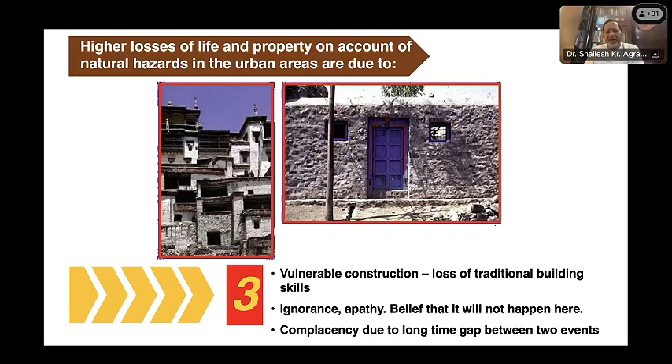Otherwise, because of the space problems everywhere, vertical extension and addition of rooms and other things are being done. That also leads to higher losses of life and property. So all of you will agree that urbanization, expansion of habitat into unsuitable vulnerable areas, higher population density, ignorance and apathy about the natural hazards, non-engineered unsafe construction, all these things are leading towards higher losses of life.

So all these things exist, and what is the scenario? We have a very robust technical framework, as well as the Disaster Management Act and disaster management policy, and I will tell you about the Indian standards. We have very good, exhaustive Indian standards dealing with all kinds of hazards in the country.

We have the National Disaster Management Authority, NDMA, and the Disaster Management Act and Disaster Management Policy clearly say that there should not be any loss of life during an earthquake or any event. So zero tolerance to avoidable loss of life is the motto of all these things. But despite all these things, we do have a whole lot of life-threatening collapses during earthquakes and other events.

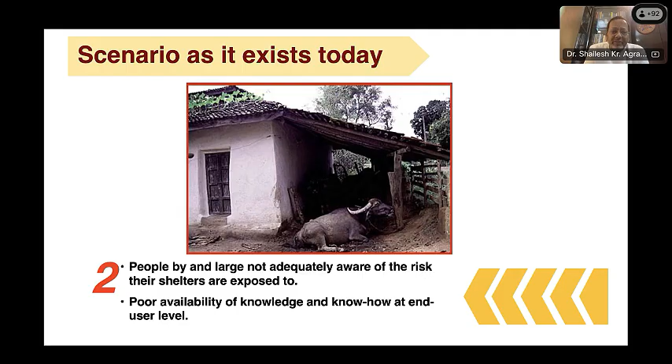People by and large are not adequately aware, and that is why these kinds of programs are being conducted. After the 2001 Bhuj earthquake, a whole lot of programs were organized, and organizations came out with literature, explanatory handbooks and all. But India being a vast country, last mile connectivity is sometimes missing. We train faculty, prospective engineers and architects, but artisans still need to be trained. So people are not adequately aware of the risk their shelters are exposed to, and there is poor availability of knowledge and know-how at the end user level.

Then, implementation of existing laws is not up to the mark. I can give you an example. The Ministry of Housing and Urban Affairs came out with model building bylaws, MBBL. It can be downloaded from the ministry's website, and all the state governments were asked to develop their building bylaws based on these model building bylaws.

And in the model building bylaws, after the 2001 Bhuj earthquake, a specific chapter on disaster management was included: if your state or area is prone to natural hazards, you need to incorporate a design basis report and get a structural stability certificate from a practicing or authorized engineer. But India being a federal country, in some states those bylaws are incorporated, in some they are not. And even where incorporated, their implementation is not up to the mark.

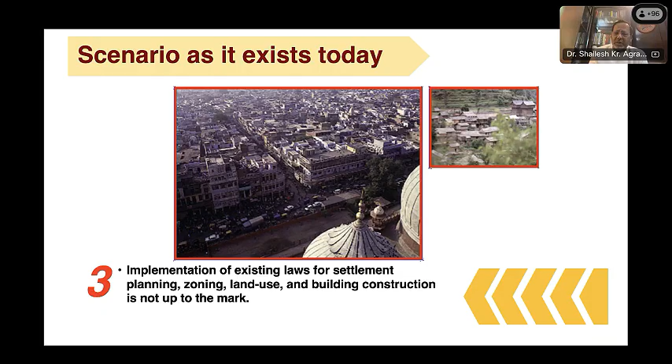Then, as I told you, last mile connectivity. There have been several programs run by the Government of India, in fact by NDMA: training programs, sensitization programs, social media uploads, manuals, films, and other things are in place. But despite all those things, there is a lack of adequate mechanisms and institutions for dissemination of knowledge.

So this is the scenario which exists, and we also know that India is committed to the sustainable development goals. SDG 11 clearly indicates that we have to make cities and human settlements inclusive, safe, resilient, and sustainable. So resilience and safety are part and parcel of any development. And I have also included here sustainable development goal 13, as we cannot take these natural hazards stand alone.

Now we have to take climate change mitigation strategies into account, because climate is changing very fast. The planet Earth is heating up, temperatures are rising, and a whole lot of things are happening because of pollution, greenhouse gas emission and energy use. India is committed to be Viksit Bharat by 2047 and to become a net zero country by 2070. So in addition to safety and disaster resilience, we need to incorporate climate change mitigation strategies; sustainability also needs to be taken into account for the built environment.

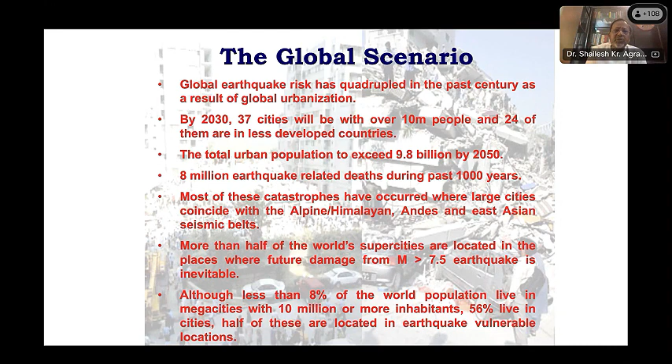Although less than 8% of the world population lives in mega cities with 10 million or more inhabitants, 56% live in cities which are vulnerable. In fact, in our country also, more than 50% area is vulnerable, in a high seismic risk zone. This is just to show you yearly. You can see here, some earthquakes keep coming, and this is data taken from the National Institute of Disaster Management.

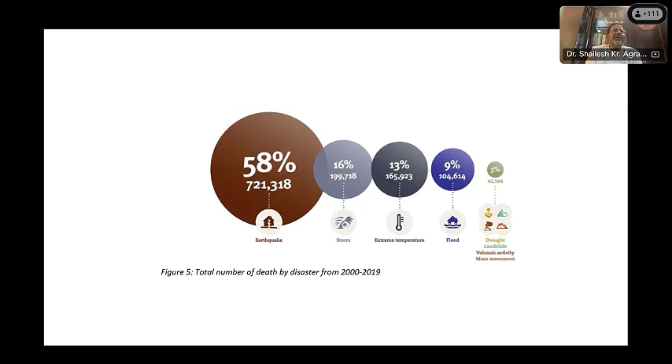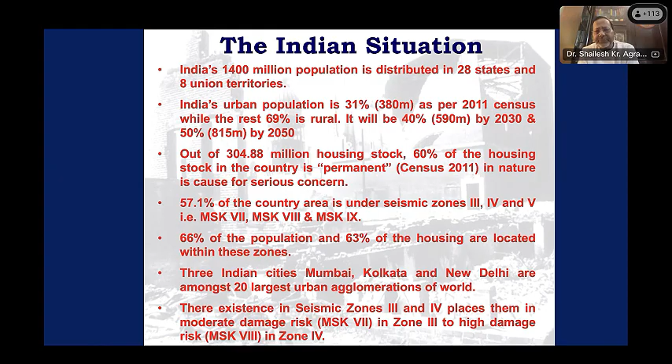And if you see here, more than 1 million houses are damaged annually, in addition to human and other losses. The earthquakes which are of magnitude more than 8 are classified as great earthquakes, and India is seat to many great earthquakes, and I have listed them here for you. The only problem is now we are just waiting, because as I told you, the return period of earthquake is quite high, and God forbid if India is to face an earthquake of more than 8, this will be disaster.

And there have been a number of studies where it has been shown that if the 1819 Kutch earthquake repeats now, the losses will be enormous, which cannot even be defined. So there will be so much loss. Okay, so you can see 1819 we had an earthquake of more than 8 in Kutch region, Assam 1897, 1905 in Himachal Pradesh, Kangra, 1934 Bihar Nepal earthquake, 1950 Assam Tibet earthquake, 2005.

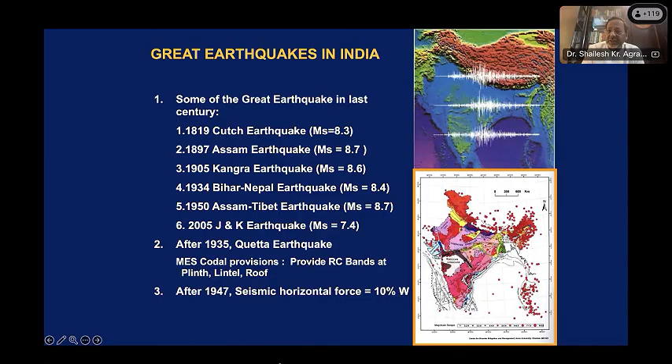And these are some of the great earthquakes, and recently, from 1990 to 2005, in fact, our urban areas, tier 2, tier 3 cities were struck with earthquakes. Like 1991 we had an earthquake in Uttarkashi, 1993 in Latur, Jabalpur 1997, 1999 we had an earthquake in Chamoli. Then 2001 was an eye opener for all of us, because that earthquake came in Bhuj, and then Ahmedabad, which was 300 kilometers away from Bhuj.

There, multi-story reinforced concrete buildings collapsed like a pack of cards, and everybody was in shock. Like, the properly designed buildings, how could they collapse, leading to huge loss of life and property. The 2005 Jammu and Kashmir earthquake also caused huge destruction. And then cyclones also, every year we have cyclones, floods, and the 2004 tsunami also caused a whole lot of losses. So these are the major natural disasters.

Just again, you can see the average return period of an earthquake of magnitude more than 5 in our country is less than 2 months. And if we divide the entire region into Kashmir and Western Himalayas, Central Himalayas, Northeastern region, Indo-Gangetic Plain, Rann of Kutch, Peninsular India, Andaman and Nicobar, you can see all areas in our country are prone or susceptible to earthquakes, and anywhere an earthquake can come.

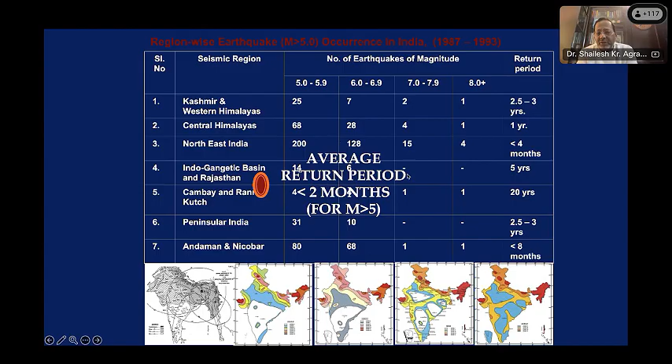Now, just to give you some idea about the losses due to disasters: Kashmir earthquake, 95,000 deaths; Bhuj earthquake, 13,000. And you see, same place, 1819 Kutch earthquake, deaths were only 1,500. So just think, because of fast urbanization, the kind of built environment we are constructing or developing, all these are becoming death traps, and will amount to higher losses of life and property.

Latur earthquake: Latur was in peninsular India, which was supposed to be a seismically stable area. There also huge destruction, 7,928 deaths were reported, and the majority of these deaths were in masonry buildings, and masonry buildings in our country are normally unreinforced and constructed by artisans without seeking help of engineers and architects. And as I told you, in the last census, out of those 304 million buildings, more than 50% are masonry buildings.

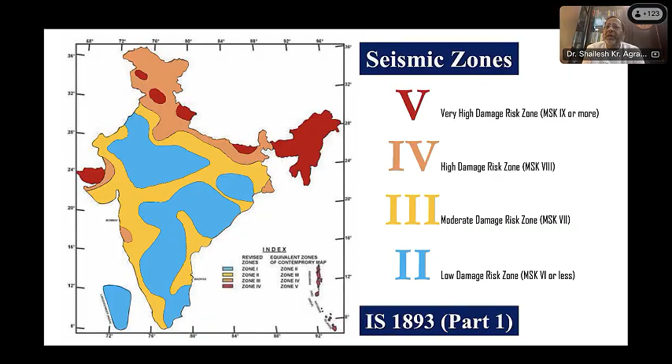So zone 5, 4, 3, and 2 are related in terms of intensity. This was the map which most of us know, and now this map is replaced by another map where we have again resorted to 5 zones. We have added another zone, 2, 3, 4, 5, 6, and all these zones are revised. I will give you a brief history of how these maps evolved.

The first map came in 1962, then it was revised in 1966. At that time India did not have any instrumentation or other means, so based on whatever earthquakes had been reported in the country, the maps were created, and the entire country was delineated into different seismic zones.

The major problem with these maps was that, suppose a place where earthquakes are coming quite frequently, that frequency was not incorporated. Only the earthquakes which had come, whether high intensity or low intensity, were used to produce these maps. But the recent map has tried to incorporate frequency and other aspects as well. That is the basic difference.

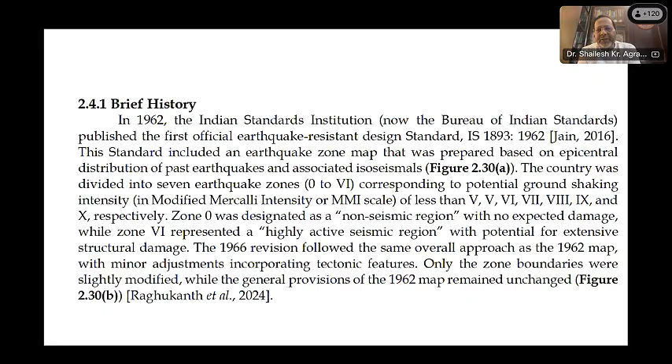And after that, this map was revised based on the earthquakes occurring in the country. The same thing happened when the 2001 Bhuj earthquake came. We divided and again reduced the zones from 5 to 4, eliminating zone 1, keeping zones 2, 3, 4, and 5.

Then in 1966, again based on the earthquakes, the map was revised and we had 7 zones. Then in 1967 the Koyna earthquake came, so again the map was revised, and by 1970 we had this map, dividing the entire country into 5 zones: zone 1, 2, 3, 4, and 5.

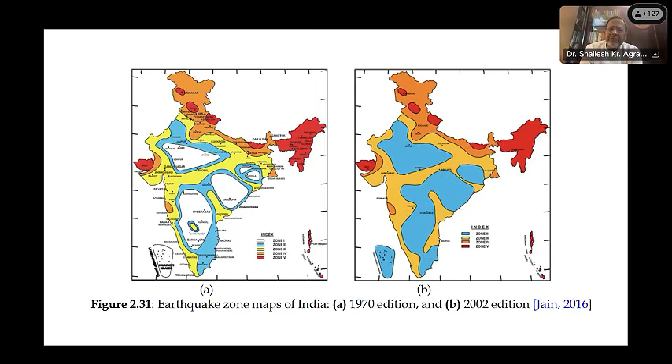So if I have to give you this in tabular form: 1962, and as I told you, these hazard zones are associated with the intensity level, and the explanation of this intensity level is given.

Intensity means the likely damage because of the earthquake. So suppose you are in intensity 7 or intensity 8, what would be the likely damage to your structure or your area - that is given. The moment you find this zone 3, you connect it with the intensity, and you will be able to find the likely damages.

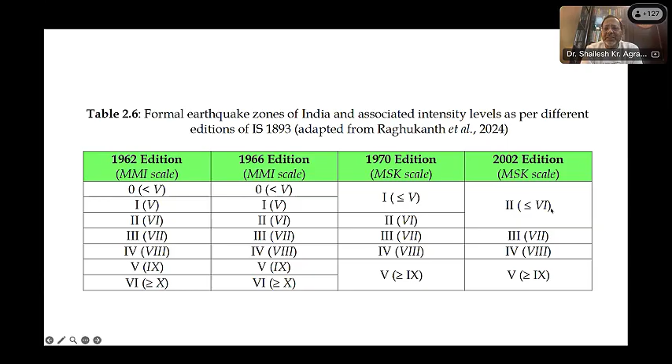So again, that is qualitative. In 1962 we had 7 zones, in 1966 7 zones, they were reduced to 5 zones in 1970, and then reduced to 4 zones in 2002. You can see here MSK intensity 6, zone 1 and 2 were merged, then 3, then 4, then 5.

Now, as I told you earlier, the nationwide earthquake hazard map defines expected ground motion intensity and ensures harmonized structural design across the country. These hazard maps can directly be used for structural design - you have to find the likely ground motion multiplied with the mass, and you get the lateral force, which you can apply to your building.

So these maps, as I told you earlier, the approach was rudimentary, based on deterministic earthquake hazard analysis, and now it has been based on probabilistic earthquake hazard analysis. Okay, so this is the map.

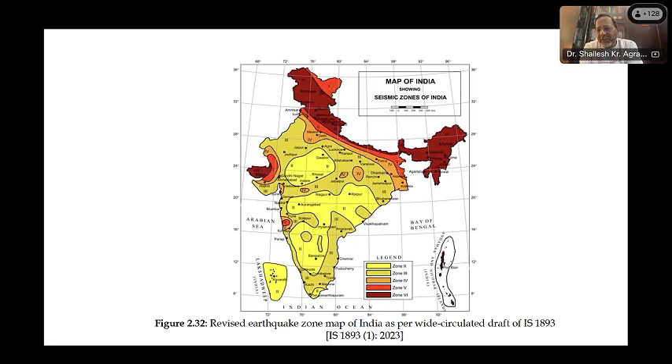The BIS IS 1893, which has finally been published now, there is a slight difference between the map which was circulated and the map which is published. That is why I'm showing you both maps. This is the map which is widely circulated - zones and everything are the same, but there is some change in the area. So please don't use this widely circulated map, but use the map given in the finally published IS 1893. So this is the map you need to use.

As you can see here, India is divided into 5 zones, and intentionally we have kept zone 1 out. We are starting from zone 2, so we have zone 2, 3, 4, 5, and 6. The areas which were falling in zone 2 earlier may now fall in zone 3, the areas in zone 3 may fall in zone 4. Somewhere zones are enhanced, somewhere zones are kept the same, and somewhere zones are enhanced by 2 times or 3 times.

There has been a lot of apprehension since this code was published that there will be a rise in cost due to the rise in lateral force. Yes, that is right. But this time the committee, CED 39, was quite aware that safety is something which should not be compromised, and safety should be given top priority.

That is why, if you look at the attributes, safety is the first thing which needs to be given importance. If you do any project, any structure you design or construct, there are several attributes to it. One is safety, sustainability, functionality, then aesthetics, and then economics. So these are the 5 attributes, and the first and foremost attribute is safety. Then is functionality, then sustainability, and then aesthetics and economics.

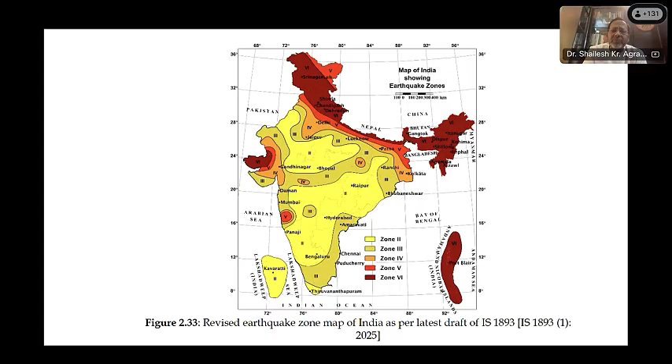So these are the 5 zones, and we have to use this map. Why is this map useful? Because this map will help you in estimating the earthquake hazard. To estimate that earthquake hazard, you can find out the earthquake force your structure will be subjected to, and you have to design your structure for that lateral force - estimating, finding out the earthquake zone, and then converting it into the lateral force.

So for zone changes, again there have been changes. As I told you, the previous 4 zones - 2, 3, 4, 5 - are now demarcated into 5 zones: zone 2, 3, 4, 5, and 6. Just by converting 4 zones to 5 zones, there has been a shifting of boundary of zones, causing many towns and cities to fall in 1 to 2 level higher zones. Earlier zones were 2, 3, 4, 5; now zones are 2 to 6. So again 5 zones, and because of shifting of boundaries, many towns and cities now fall 1 to 2 levels higher than previously.

That amounts to your structure being subjected to higher seismic forces. For example, cities like Bareilly and Patiala, which were earlier in zone 3, and Almora, Chandigarh, Darjeeling, Dehradun, Gangtok, Nainital, Shimla, which were previously in zone 4, now fall in zone 5 and zone 6. Bareilly and Patiala are 2 zones above - from zone 3 they have come to zone 5. Similarly, Dehradun, Gangtok, all these highly seismic vulnerable areas now fall in seismic zone 6.

Added to this is the fact that the estimate of peak ground acceleration has generally increased. Because of change in zone, and also because of incorporation of probabilistic seismic hazard, the peak ground acceleration has increased in each zone. For design forces, earlier we had an importance factor, but this time the importance factor has been capped at 1, and we have kept different return periods. Earlier the return period was not there; now, based on the kind of building you are designing, you can choose the return period, and based on that, estimate the earthquake force. This is the major change.

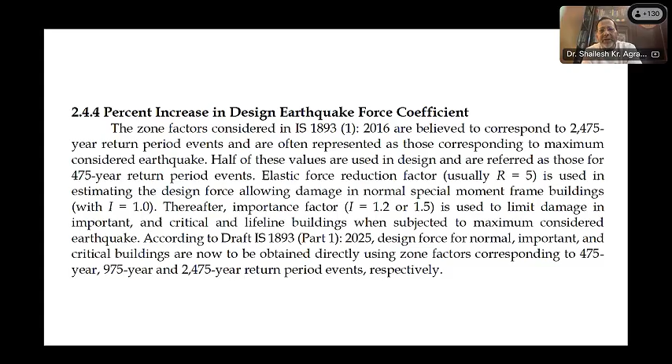And again, as I told you, the response reduction factor is kept, but the importance factor is now 1. Earlier, depending upon the kind of building, the importance factor was 1.5 for crucial services, 1.2 for important buildings, and 1 for all normal buildings. But this time we have kept I as 1, and we have changed the return period. So based on the return period, you can have the zone.

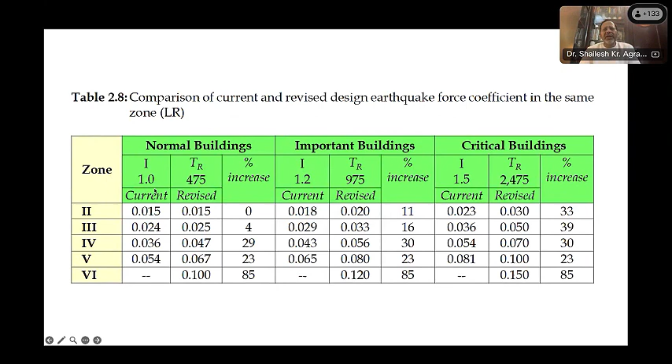For normal buildings, the revised percentage is nothing for zone 2, zone 3 4%, zone 4 29%, zone 5 23%. Similarly, important buildings 11, 16, 30. This was where the zone is the same in the earlier and the newly published code. But if your zone is enhanced by 1 level, the percentage increase is quite high. It goes up to more than 100% for critical buildings, or 86% for important buildings. And if the seismic zone is 2 levels higher, it goes by more than 200%.

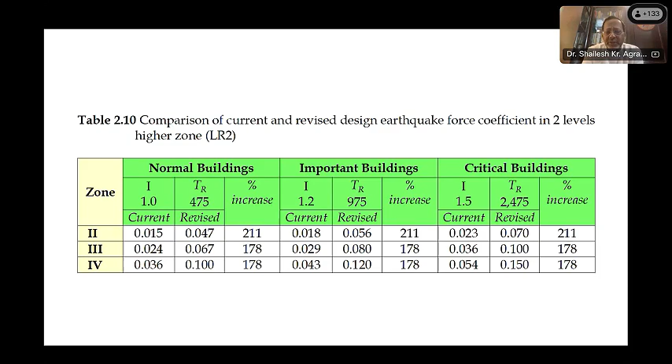I thought of showing you this data. The National Disaster Management Authority created an expert group comprising IIT Madras, IIT Bombay, Central Building Research Institute, IIT Roorkee, and other academicians, and asked them to submit the seismic risk assessment of the country. They submitted a report to NDMA, and all these tables and maps I showed you are part of that report. So this is authentic data taken from that report.

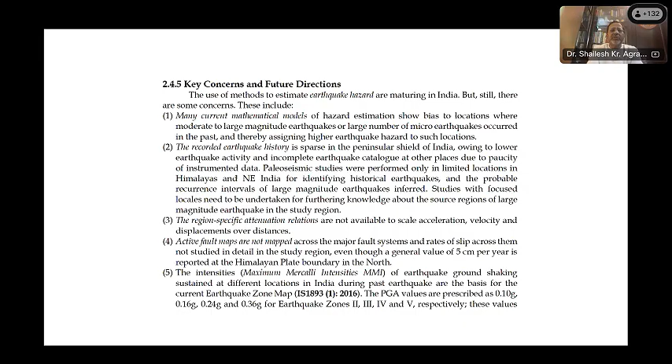Since there have been a lot of apprehensions amongst professionals that there will be a substantial increase in the force, we have objectively put these things in the report. And yes, there will be an increase, and we have to choose between safety and other aspects. This time safety is given priority. I will not cover this. There have been other key concerns also, regarding region-specific attenuation, but I'm not going into detail on all these things.

Then this time, soil. Effect of soil: if your building is founded on a rock, or if it is founded on an alluvial plain or on a marshy land, the effect of earthquake will be different. The earthquake waves get amplified when they pass through soft soil. If your building is founded on rock, nothing may happen, so the seismic waves may get attenuated.

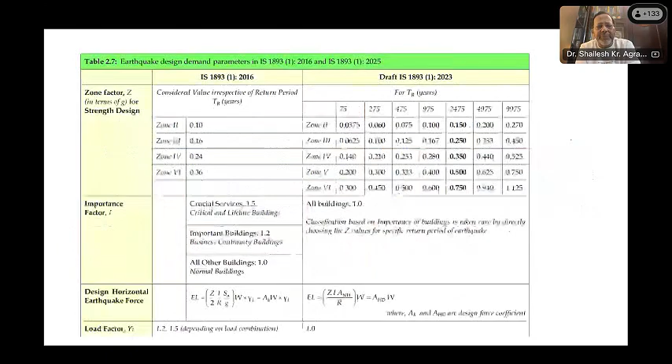There are five soil conditions, and based on that you can choose the response spectra, and from this response spectra you can find out the horizontal acceleration. Just to make you understand, this is the seismic zoning map. So from this seismic zoning map, this is the formula. From the seismic zoning map, you find out this coefficient. I, R, and everything is given in tabular form. Then you have to find out this Ah, and W is the weight.

So for this Ah, what will you do? Z is from this table, where you choose what kind of building you are creating. Based on that you will choose the return period, and based on this return period, in which zone your area is falling, you will choose the Z factor. Then for Ah, the seismic coefficient, you will use this response spectra.

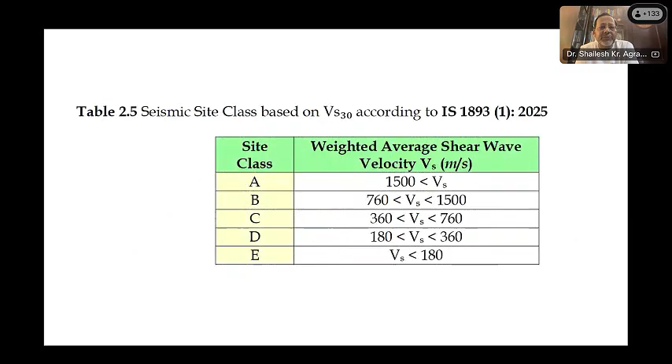And in this response spectra, you have to find out the time period. For the time period, this is a natural period for which detailed formulas are given in the code. Depending upon the height of your building, width of your building, type of building, you can estimate the time period readily. Once you know the time period, you can find out the design horizontal acceleration. That acceleration, when multiplied with the weight, will give you the horizontal force your building will be subjected to. And here we are incorporating the soil conditions.

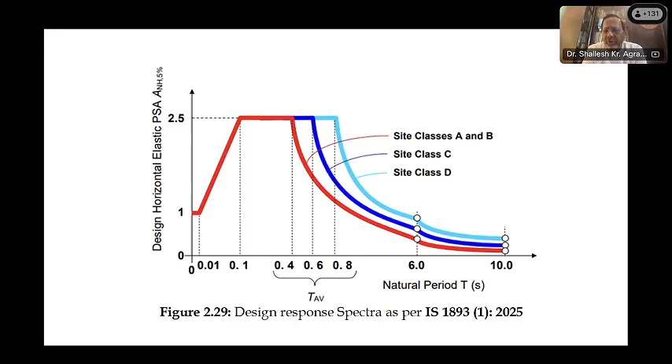So this is all about IS 1893, and very soon a few explanatory handbooks will be published by BIS to make things easy so that everyone can comprehend this. So this was all about 1893, and I thought I would try to address some of the apprehensions of professionals about these codes. Okay, so now let me move to the easier part.

As I told you, whenever an earthquake comes in the country, we come out with robust codes, we come out with guidelines and all. But over the years, we keep on forgetting about this. In 1935, when India was not even independent, an earthquake came in Quetta, which is in Pakistan, and there was huge loss of life and property. But in Quetta there was a military establishment, and they came out with the code in 1935.

There they introduced lintel band, corner reinforcement, and all these things for masonry buildings, and the entire Quetta town was reconstructed. Then again an earthquake came there, and the buildings which incorporated those earthquake resisting measures performed very well. That bond was called Quetta bond. But after some time we forgot; because that was a military installation, they could enforce those measures. But with the passage of time, all those things were forgotten.

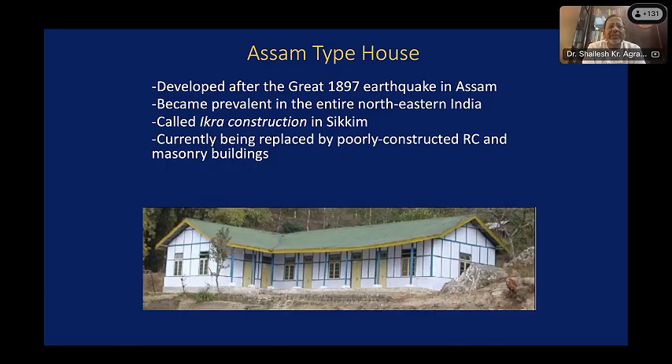Assam type house: we have Ikra walling, and then we have bamboo, which is excellent for seismic resistance, lightweight roofs, all these traditional structures. And I already told you that was known as Quetta bond, which now we have as lintel band, plinth band, and all those things.

So in 1935, the first seismic code was developed. In fact, at that time 10%, 0.1, was the seismic coefficient. After the 1935 earthquake, the code was formulated, and it was said that all the buildings should be designed so that the horizontal force should be 10% of their weight. Okay, so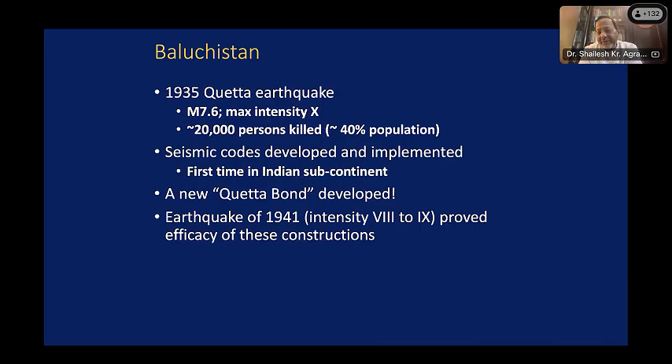In 1935, all these things were given. You can see quoin bond, vertical reinforcement, corner reinforcement, everything was given during that earthquake. Okay, but with time we forget that. Now let me just tell you that it's not new.

The 2001 earthquake was the eye opener for all of us, and that is why after that, earlier disaster management was part and parcel of the agriculture ministry, and then it came under the Ministry of Home Affairs. Then NDMA was established, the National Disaster Management Policy came into place, the Disaster Management Act came, building bylaws came into force, a whole lot of things came, because all kinds of buildings, properly well built reinforced concrete buildings, high rise, posh apartments in Ahmedabad, collapsed like a pack of cards.

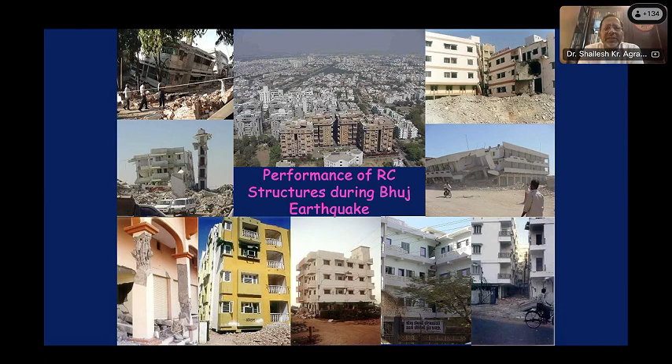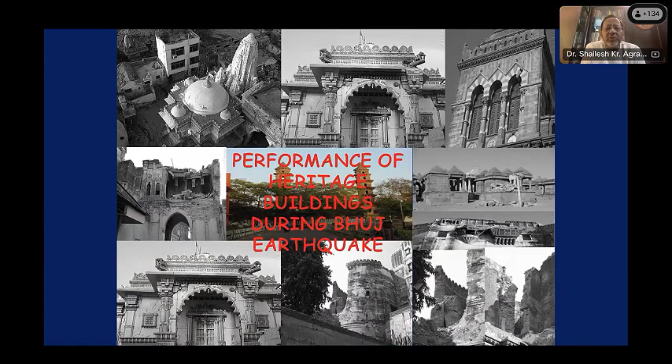Okay, then again a whole lot of work was done, and heritage structures, more than 10,000 heritage structures, suffered huge damages: domes of historical buildings, huge walls, stone masonry walls, they all collapsed during the earthquake. So heritage buildings also suffered damage during the earthquake.

Then there is another important thing which we observed: immediately after an earthquake, everybody resorts to repairing of structures. But it was found that most of the time this repair is cosmetic repair, without getting into how the structure failed and how it should be strengthened. We need to understand the difference between strengthening and repair. Repair is something cosmetic. If something is falling, you just put some support to it and make the structure again.

But if an earthquake comes again, you are not strengthening it for horizontal load or for ground shaking. For that, you have to seek the advice of a structural engineer, and you have to understand the building, its structural type, the damage, its residual strength, all those things. It's a very scientific and expert area, and you need to seek advice of experts for doing retrofitting of a structure.

So just looking at the damage and covering it with plaster and putting some sort of support without connecting it with the other parts of the structure will make your structure more vulnerable to future events. So unscientific retrofitting is to be prohibited, and specialized contractors and professionals need to be consulted for undertaking any repair, strengthening or retrofitting work. So repair is cosmetic, retrofitting is strengthening of your building scientifically.

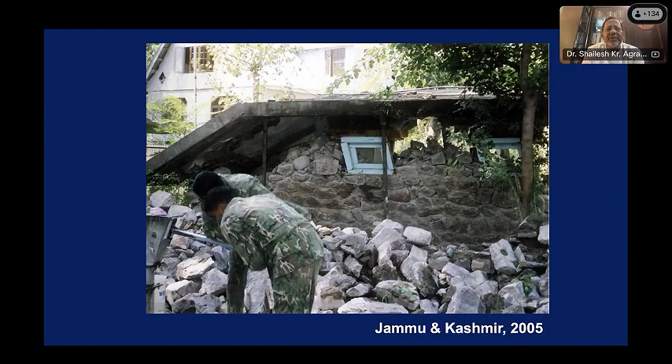Some of the failures I'll just show you quickly. So you can see here, this is a heavy roof which was just put on steel tubes, and that is why the entire roof failed. You can see here again, same thing. You can see this is random rubble masonry, and so there's a thick wall. And what you see here, that wooden thing, just because of this, the upper story did not fall.

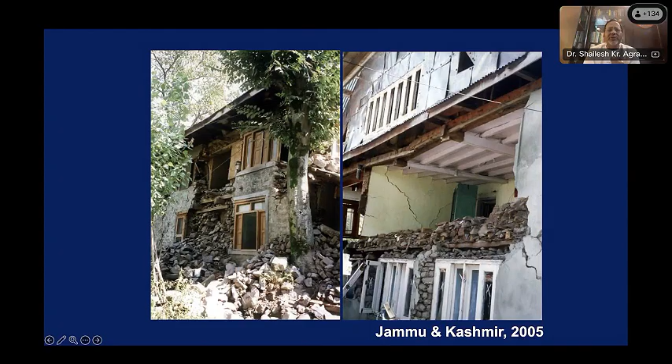So this is why we provide a lintel or lintel band. That is the beauty of lintel band. Lintel band connects all the walls together, thereby making your building safe. This is again out of plane failure because of the thick wall, and that thick wall gave away during earthquakes. You can see this is a classical example that because of this wooden plank which acts as a lintel, the upper story was safe.

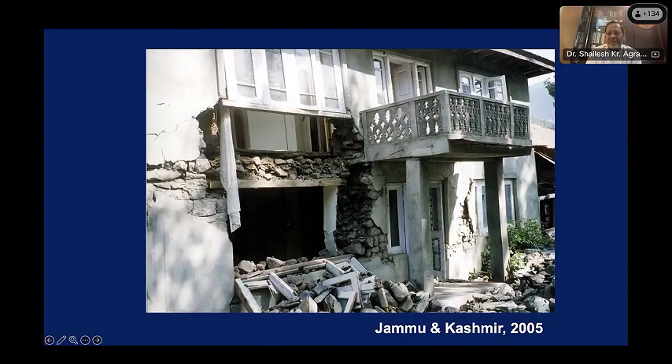Yeah, again the same picture you can see. So you can see because of this band, nothing happened to this building. So if you provide a reinforced concrete beam, which is called a lintel band, at the opening level, at the door or window level, lintel level, then your building will become safe.

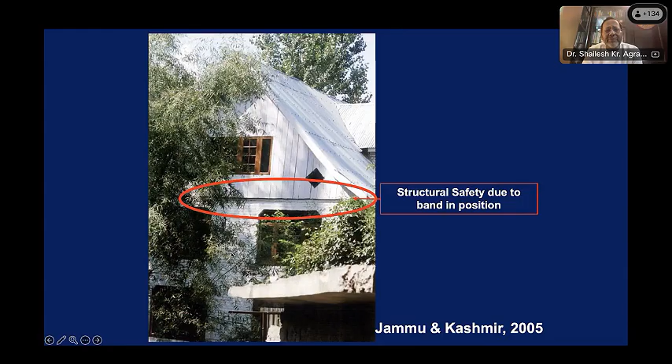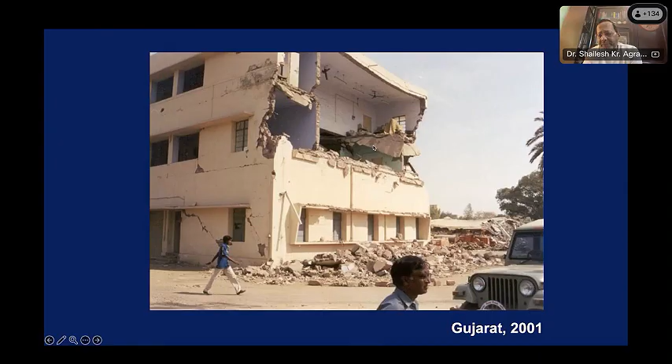Okay, so this was just to show you, and now I'll quickly show you pictorially some earthquake resisting measures and planning and design measures. So after the 2001 earthquake, IIT Roorkee Department of Earthquake Engineering published some handbooks in pictorial form, so that masses at large understand the earthquake and related phenomena better. I have taken these pictures from those guidebooks, where, in a very simple pictorial form, the complicated earthquake things are being explained.

Okay, so first of all, let me again clarify that we don't say that a building will not suffer damage during earthquake, because you cannot design any building which will have no damage, because we don't know what kind of earthquake will come and what would be its intensity or magnitude. So the philosophy is that during minor shaking, there should not be any damage. During moderate shaking, there may be some collapse of wall, and during strong shaking, there may be collapse, but there should not be any life-threatening collapse.

Understand? So during minor shaking, there should not be any crack. Moderate shaking, there should be some cracks. And during extreme strong shaking, the building may suffer damage, but it should not collapse. So collapse prevention under strong shaking. That is the philosophy: there should not be any life-threatening collapse to your building. That is why earthquake design is special, because here we are allowing damage to occur in the building. We are not making a building which will not have any damage during earthquake.

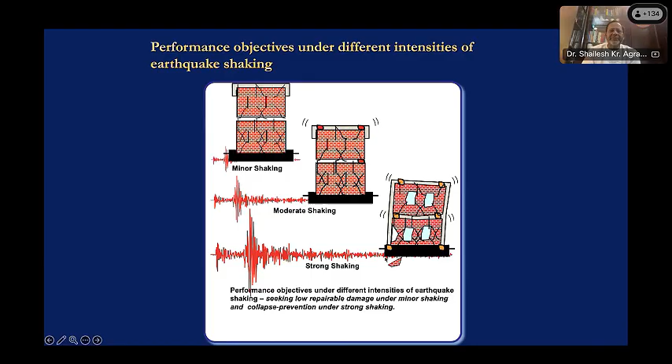Okay, and that is why this performance objective is written. There should be low repairable damage under minor shaking, and there should be collapse prevention under strong shaking. And so the basic philosophy is to ensure continuity of vital services, to prevent human injury and loss, and to minimize damage to property. Okay.

So now, these are self-explanatory, so I'll go slightly faster. The building should be sufficiently away from a steep slope, because during earthquake, the steep slope may fail, thereby endangering your building. Similarly, you should not create the foundation of your building on filled-up soil. If you have filled-up soil, you have to go for pile foundation or something like raft foundation. Your foundation should rest on a hard strata. Okay.

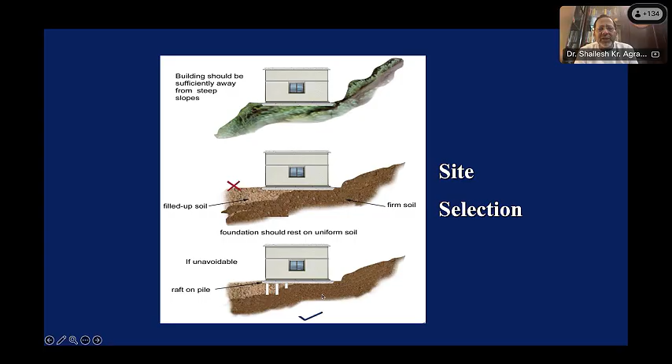Similarly, these kinds of asymmetric structures should be avoided, like T, L, U, X plans. All these kinds of plans should be avoided. And if these plans are mandatory, then what you can do is divide this into parts, like this, three parts. So you provide a separation joint. The plan will remain the same, but the only thing is, when you have this kind of thing, there will be severe cracks and damage at these corners.

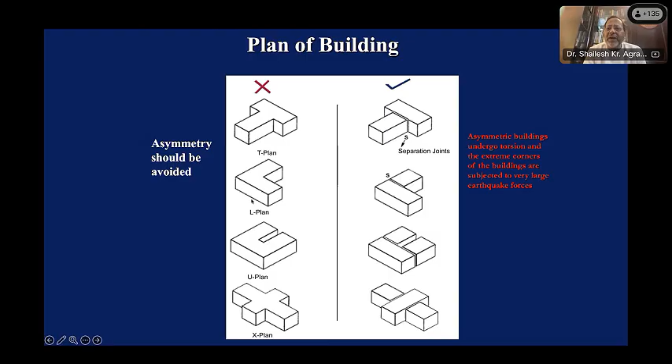But the moment you separate these and create three blocks, there will not be any, because all these three blocks will behave independently during horizontal shaking. Okay, so you can create a separation joint. So simple symmetric buildings are the key for earthquake resistant construction. Asymmetric buildings undergo torsion, and extreme corners of the building are subjected to very large earthquake forces.

Okay, again, you can see this general shape, inverted pendulum. This should be avoided. Buildings should be this kind. Very slender buildings should also be avoided. So the thumb rule is the H/B ratio should be less than 4. Similarly, this kind of building where you have a top like this is to be avoided, because it's not symmetric, and here this huge mass is acting on this. And if you want this kind of building, you have to create it in 3 parts, or here it should be in two parts.

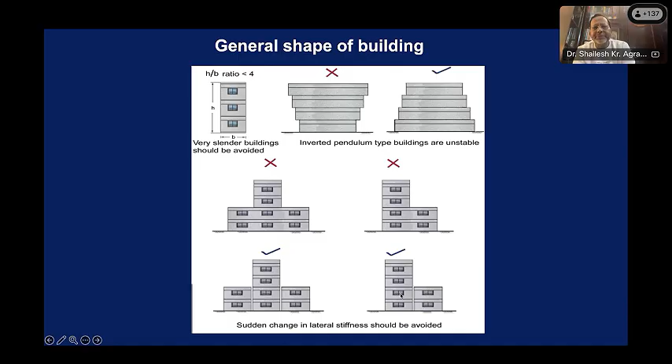Similarly, during the Jabalpur earthquake, parapet walls and balconies suffered a whole lot of damage. If you're coming out of your building during an earthquake and a brick falls from the balcony, that can lead to loss of life, as in the Jabalpur earthquake. People were coming out of a three-story building, and a brick fell from the parapet, causing the loss of a military person. So avoid large balconies, avoid these kinds of things.

Then another thing is called floating columns. Normally municipalities count the ground coverage area. So to have better FAR, they provide fewer columns on the ground, and the columns coming from the top story to the first floor are terminated at the first floor, so that they get the advantage of better FAR, because FAR is based on ground coverage. This kind of floating column was seen during the Bhuj earthquake.

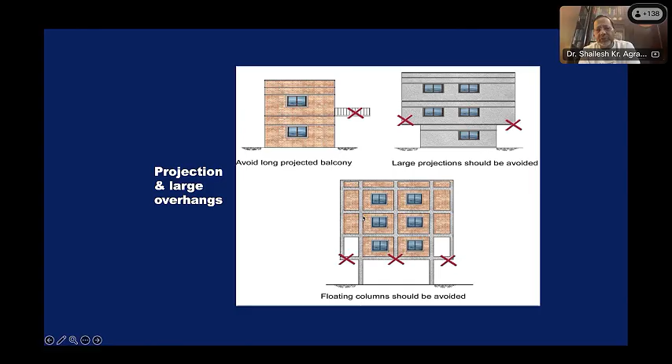And the minimum gap per story is given in the code, Indian Standard IS 4326, which provides that gap. So a 20 millimeter per story gap is given for buildings. Then separation joints: as I told you, if you have to create dissimilar or asymmetric buildings, you have to construct the building in different parts, and in between you have to provide a separation joint.

The separation joint should not be stiff, because it should allow movement to take place. During horizontal shaking, during the ground motion, the two buildings will strike each other. So the separation joint should have a softer material, like some kind of rubber, and it should be properly detailed. Separation joint details are given. It should be a bitumen filler, so that it allows movement to take place.

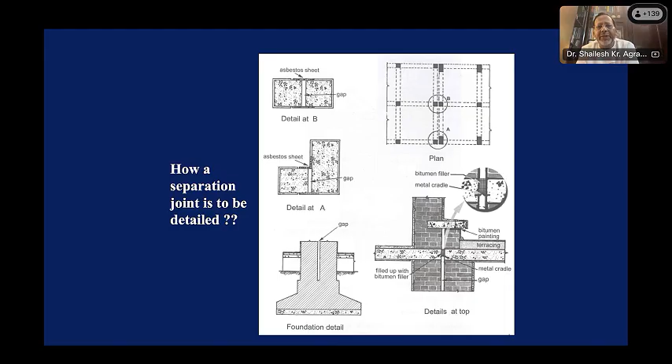There should be compression in that joint, so that material should be flexible enough to allow movement to take place. As I've been telling you, non-engineered construction is something which suffers the most damage, and thereby there are guidelines published for non-engineered construction also, some thumb rule kind of thing.

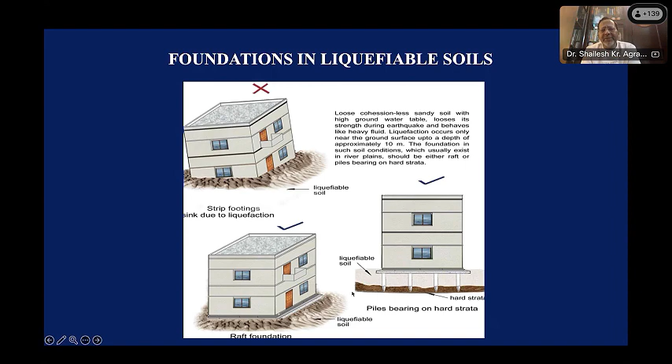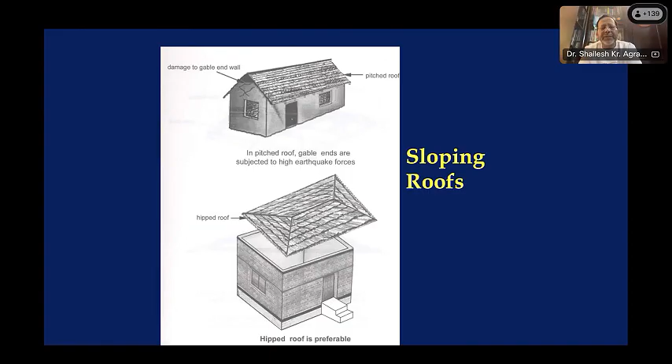You can see here, and if you want to make a roof, you have to properly connect it with cross bracings and all, like this, so that the idea is the entire roof structure, the entire building, should act together. You have to connect all the parts together, so that the building behaves together during shaking.

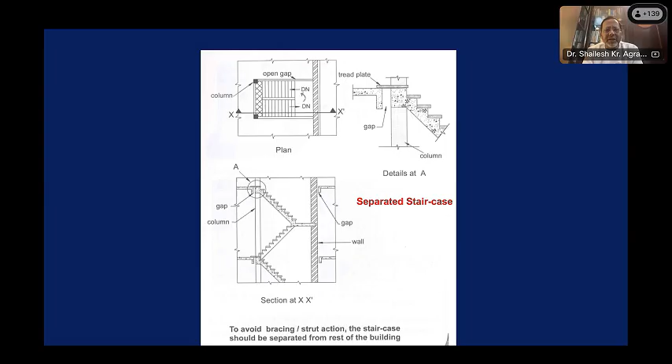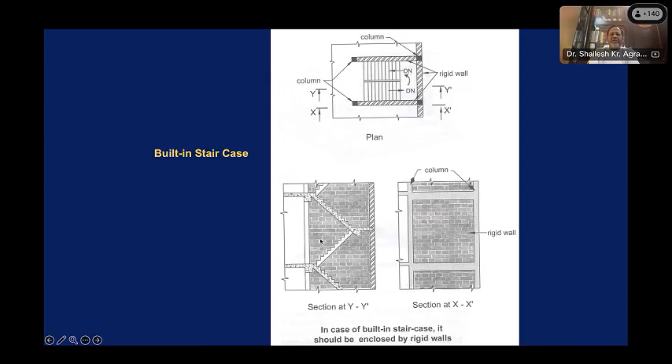So to avoid bracing or strut action, the staircase should be separated from the rest of the building - detailed guidelines are given in the code. These are your columns, so you have to create a separation joint and a separate structure for your staircase. If you create it connected like this, it will act as a strut or bracing, thereby endangering this structure. So what you do is just create a small gap - a separate staircase and a separate building, with a separation gap here. The building remains the same, only thing is you are allowing movement to take place here.

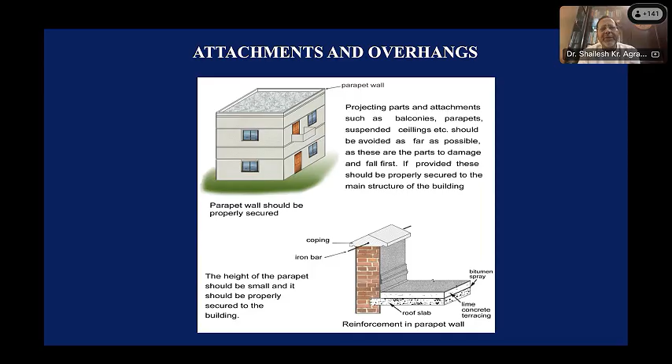Earthquake resistant detailing is required for staircases and must be carefully designed and constructed. I gave you the example of the parapet wall - you can always create a parapet wall, but that parapet wall or any attachment, whether it's a balcony or suspended ceiling, should be properly secured with the main structure. Parapet wall is something very important - you have to put reinforcement in the parapet wall and connect it with the reinforcement of your roof, so that the parapet wall acts as part of the building.

Then again, large overhang - you might have heard that during the Bhuj earthquake, a very posh apartment, a very high rise structure, collapsed, and later it was found that the residents of that building wanted to have a rooftop swimming pool, so they created one. Once you create a rooftop swimming pool, there's a whole lot of water, and that water was not taken into account during the design. So that was a later addition, and because of that heavy mass at the top, the building collapsed.

You might have seen very recently, an earthquake in Philippines, and there was a report on TV where the building was shaking and a whole lot of water was spilling out at the bottom. So swimming pools or any heavy structure at the top should be avoided, and if it is inevitable, you have to properly connect it, giving it a proper load path, so that during earthquake the load is transferred properly.

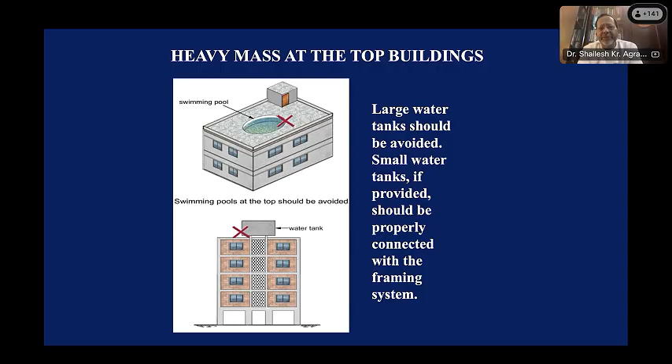So this was about the planning, and now let me show you something about masonry buildings. As I told you, normally masonry buildings are not designed in our country. We have a 9-inch wall, and then there are thumb rules that you provide a 4.5-inch slab, then openings as per your convenience are provided.

There is a code, IS 4326, which in detail gives the guidelines on how to construct earthquake resistant masonry buildings. India is a country where we have not only a code on brick masonry, but also a code on low strength masonry, mud buildings, stone masonry buildings, and wooden buildings. For all these kinds of low strength masonry buildings, we have Indian standards, and you can always make use of that standard to create earthquake resistant masonry buildings.

So what is to be done? You have to first find out the earthquake zone, ground slope, soil type, building bylaws and surroundings, then select the shape of the building, then do the foundation design. As I told you, foundation design is very important. If it is soft soil, you have to properly design and give the proper depth. If the water table is high, then you have to go for piles. So all those kinds of things are to be seen.

Then wall design - again we normally take 9 inches as wall thickness, but what should be the wall thickness and mortar composition, all those things are given in the code, I will show you. Wherever you have an opening, you have to provide earthquake bands, and those bands are to be provided at any opening, at plinth level, at lintel level, and at roof level. If your roof is of RC, then a roof band is not to be provided. Okay, I'll show you pictorially.

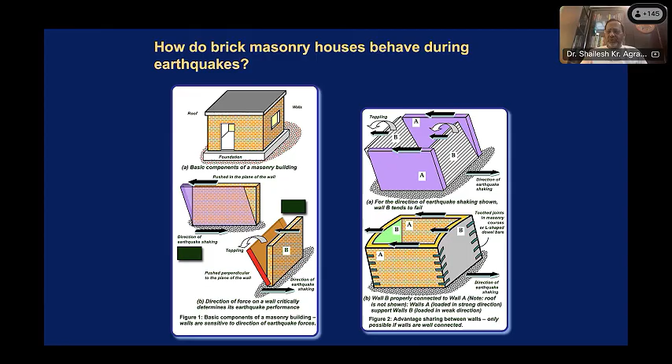How can you achieve that? By connecting these 2 walls together - so what we do is provide a band. I will show you the next picture. So you see here, this will go like this and that will go like this, thereby creating a separation here. So you have to connect all the walls together, to have a box-like action to avoid failure. Okay, so that was for masonry buildings.

Similarly, you can see slender walls - very thin and long walls need to be avoided. Otherwise what will happen, they may collapse. So again, in the code, height by thickness ratio and length by thickness ratio should be within limits. That is given in the code.

You can see here, long walls are to be avoided, and if you can't avoid this wall, if you require it for some purpose, then you have to provide a buttress of this kind. Otherwise, the best thing is, instead of a single room, create 2 rooms with a cross wall. But if you require this long wall, you have to put some kind of strengthening measure called a buttress in brick masonry, so that you can have a long wall, but this long wall is avoided.

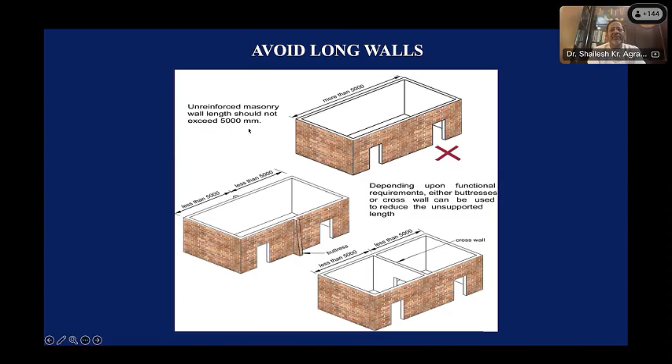As given in code, unreinforced masonry wall length should not exceed 5 meters. Minimum thickness of your foundation should be 500 mm. Then you have to provide a plinth band, and if you are going for RCC foundation, this is the kind of foundation you provide.

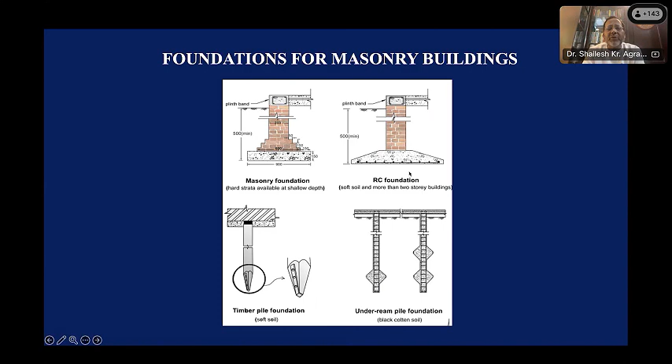Then timber pile foundation if you have marshy land. In villages and such places, we have random rubble masonry, ashlar masonry, or stone masonry.

Similarly, when you have a very thick wall, if you don't connect the two leaves properly, they act differently, and there will be splitting. So every 1.5 meters, you provide a through stone to connect the two leaves. To avoid splitting of rubble masonry walls, you have to provide through stones.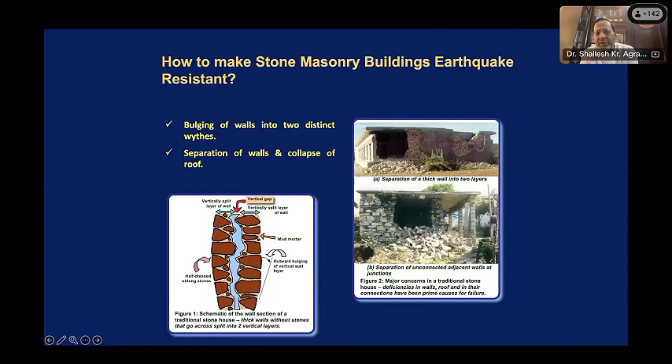As given in code, every 60 centimeters, meaning 2 feet, you provide a through stone. By providing this through stone, you are not allowing the two leaves to act separately. In plan, this is how it is provided, every 1.2 meters, and in height it is around 2 feet.

This can be a through stone or a wooden plank, and you also provide small reinforcement to connect the two together. So these through stones or bond stones will be vital in preventing the wall from separating into two wythes.

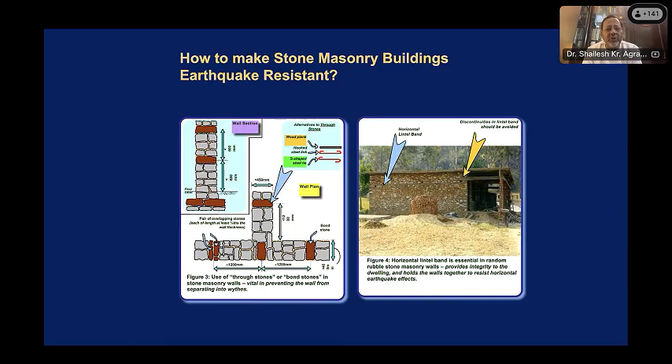Then regarding openings: where should the opening be? Opening should be in the center. As given in code, the opening at the corner should be avoided. The opening should be as small as possible and provided away from the corner, normally at the center. The code specifies that minimum distance between your opening and the corner should be around 600 mm.

You can see this kind of thing regarding openings: where to provide them, how many should be provided. Opening should be less, because openings weaken the masonry. So if you are providing openings, you have to provide reinforcement, a steel bar here, rebar here, and a band here.

I'll show you in the next slide. You can see here, this is what I was talking about, the bands you have to provide.

This is the plinth level. You have a foundation, then at plinth level you provide a plinth band. Then at lintel level you provide a lintel band, and at roof level you provide a roof band. All these bands together will allow your building to act together, ensuring box-like action between walls, since all the walls are connected together at different levels.

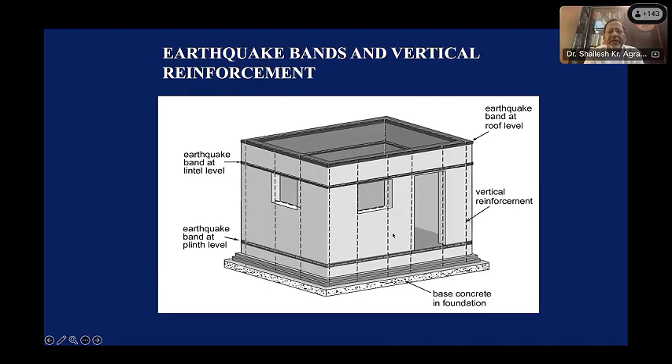Similarly, wherever you have openings, you have to provide corner and vertical reinforcement. This kind of grid is provided so that the building acts together. This is how the band is provided, this is called the lintel band.

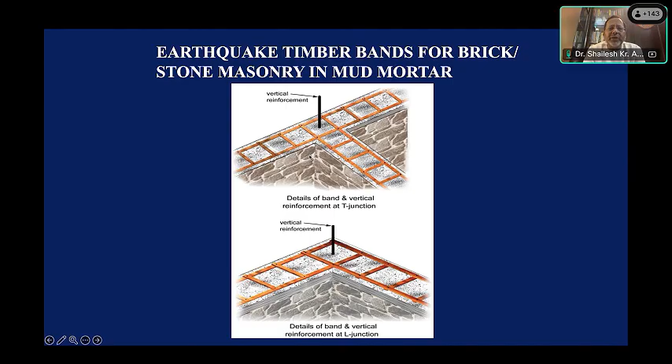So I'll stop at masonry buildings only. So this is the band. When you have a random rubble masonry, you can also provide a wooden plank of this kind. So the idea is to connect all the walls together. And when you have brick masonry, then you can provide this kind of band; again, all these things are given in code. I'll show you some tables also.

Then this is the vertical reinforcement which you need to provide. Okay, so this is how this band is, and this is the typical band details, again given in code. So if the band depth is 75 to 150, if it is 6 inches, then you have to provide reinforcement like this, otherwise like this.

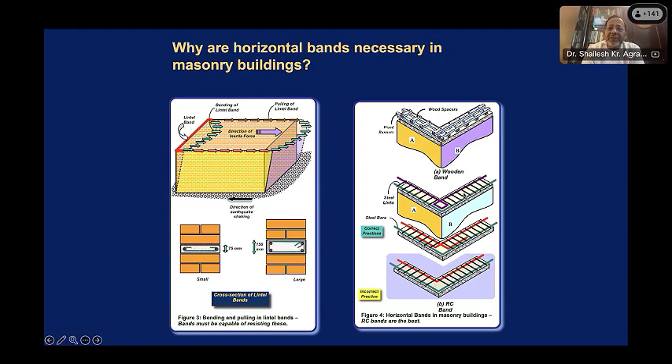And then corner detailing is also very important. At the corner, the detailing should be like this. The reinforcement should not be terminated at the corner. It should pass through in a continuous way at the corner. Okay, so again, this is taken from the code.

So suppose you are having a masonry building in zone 2, then what should be the mortar mix, what bands you have to provide, whether you have to provide vertical reinforcement, what should be the dia, what should be the mortar mix, all those things you can take from this table. And if your building is on hard soil or medium soil, just by referring to this table, you can find out what are the earthquake resisting measures.

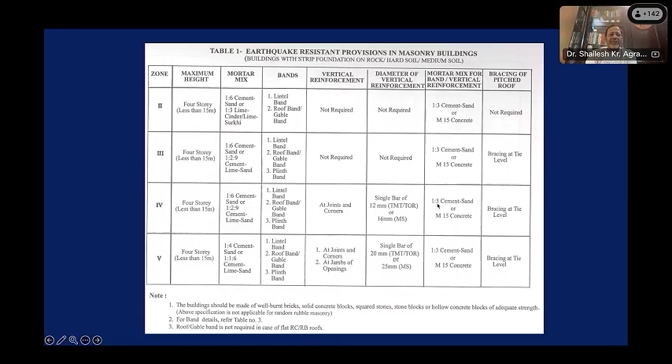Suppose you are in zone 4, and you are constructing a building of 4 stories. Then 1:6 should be the mortar for brick walls. Then you have to provide a band at lintel, at the roof and at the plinth. Vertical reinforcement you have to provide, which should be of 12. Then for vertical reinforcement, what should be the mortar mix, all these things are given. And again, if it is on soft soil, then what should be the earthquake resisting measures, that is also given.

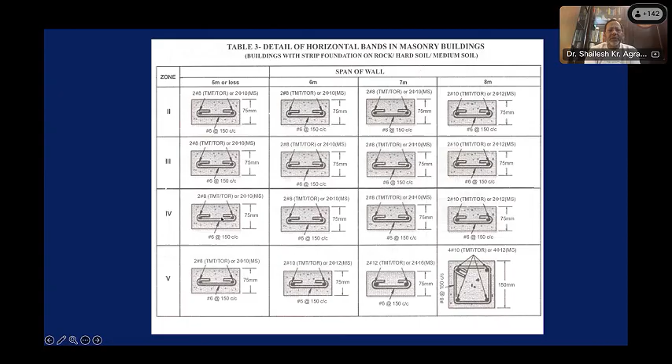And the band we are talking about, lintel band, roof band, and plinth band, what should be the reinforcement, what should be the thickness. So suppose you are in zone 4, it is hard soil, then this should be the detail of your plinth band or all the bands. So it should be 3 inches. The reinforcement should be 2 bars of 8 mm dia TMT bars, and then this is the stirrup or link. Okay. So I think that is all.

These are the Indian standards, as I have told. Now we are revising all these standards. Somebody was asking, you can download them. The good thing is that BIS is now open. Earlier we had to buy the standards, but now you can download all these standards by going to the BIS site. You go to the BIS site, you register yourself, and then download all these standards.

As I've been telling you, India is one of the few countries which have very exhaustive standards covering all kinds of buildings with regard to earthquake resistant construction. In fact, not only earthquakes, but floods, cyclones, landslides, for all these things we have standards and guidelines published by NDMA. So for earthquakes these are 4326, 13827, 13828, 13920 for detailing of reinforced concrete, then for masonry buildings, 13935 for strengthening,

15988 for seismic evaluation. So all these codes you should refer, and my advice or request to you would be that if you are designing or constructing a building in an earthquake prone zone or any disaster prone zone, please refer to these codes and follow them religiously.

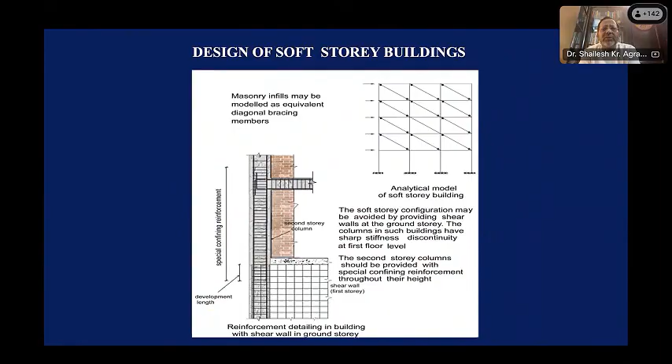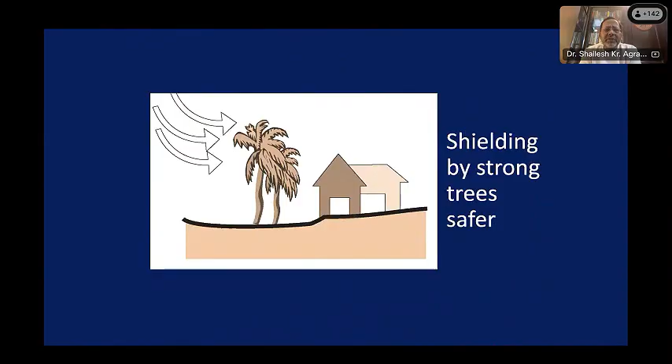Okay, so that's all. Because of paucity of time, I am not able to cover these things. In case you have any questions, you can write to me. Anyway, I will give this lecture to Sushant. So this was about masonry buildings. Then I wanted to cover something on strengthening, so that also I'm not covering. Okay, I will just go to the last one or two slides. I will show you.

So at BMTPC, because earlier I was heading BMTPC, I recently retired in November, we have created a beautiful document called Vulnerability Atlas of India. We have created a website for the Vulnerability Atlas of India. So just on a click of a mouse, you can find out the hazard of your area, in terms of earthquake, flood, wind and cyclone and thunderstorm. So we have digitized maps.

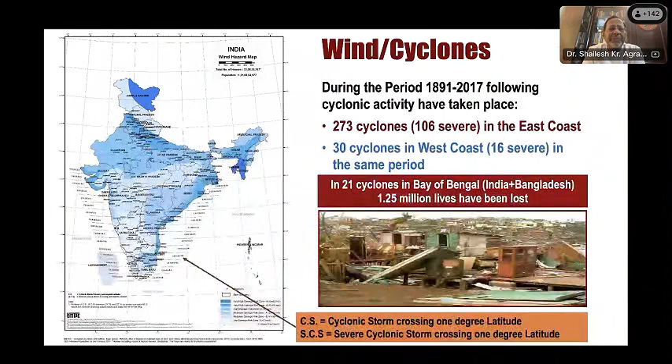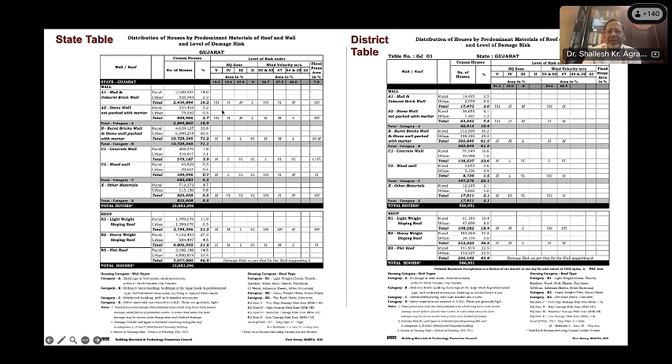I will show you another one. So this is a district-wise table where, depending upon the kind of house you are living in, you can find out the vulnerability or earthquake damage risk. If you are in zone 5 and living in a masonry building, what should be the damage risk? And suppose it is a very high risk zone, that means your building is likely to have some damage during earthquakes.